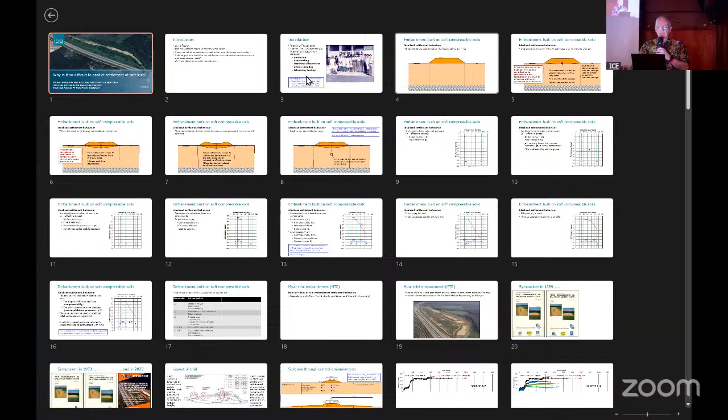Okay, thank you, Valdi, for getting everything ready for me. I would like to just get a laser pointer working. Oh, that's the wrong thing to do. Okay, in that case, I won't try and get - oh no, the laser pointer is here.

Good evening, everybody, both here in our offline venue and for everybody who is online. Thank you very much for joining us for this technical evening this evening.

I chose a title here which might be surprising for people: why is it so difficult to predict settlement of soft soils? As a bit of an introduction, the first question would be, well, is it difficult? I think perhaps, especially for the students who are here, it apparently is quite easy. We get some parameters, we calculate a few stresses and loads, we do a calculation and we get a result. But the problem is, do we often get a chance to check how good our calculations are when it comes to settlement? And I think the answer is not very often.

So today I want to go back to some basics, and the presentation is mainly aimed at the construction of embankments over the Holocene marine clays, which are plentiful around the coastlines of Indonesia, Malaysia, Singapore, Thailand, and so on. These are very common problem soils.

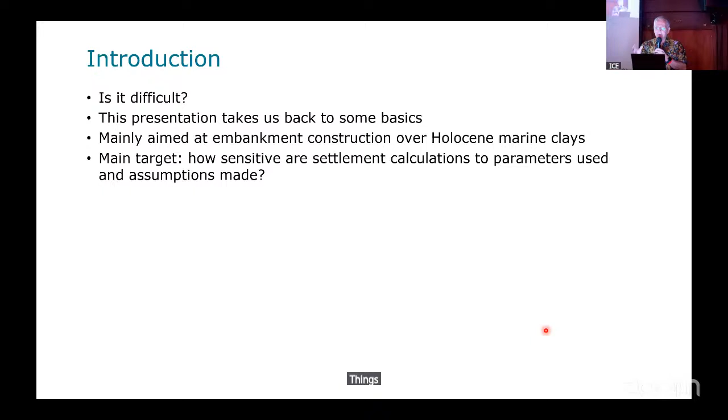The main target of what I want to discuss today is how sensitive are the settlement calculations to the parameters used and the assumptions made, things which seem to be apparently quite simple. To help us, we're going to look at a trial embankment, which provides a lot of very valuable information.

It was mentioned just now that I was lucky enough a few years ago to spend 2 years setting up and running a soil testing laboratory in Malaysia, and you can see our team of people there. I'm not in that picture, I'm taking the picture. If you think I am, actually the tall and distinguished gentleman towards the right-hand side is Professor Peter Wroth, who was one of the world's very finest geotechnical engineers, sadly passed away soon after this photo was taken. Anyhow, that's an aside comment.

I'd just like to mention that in my time with CSL, we carried out a lot of in-situ testing using various techniques. We worked very hard on getting good quality samples and carrying out laboratory testing. I think a lot of my understanding and knowledge today comes from those 2 years when I really had to get involved in a hands-on way.

I also got involved in 2 trial embankments in Malaysia: the Muar trial embankment, which is the one we'll talk about today, and another one a bit later on, which was the Juru trial embankment. Certainly when you get involved in these things, you do learn a lot quite quickly about various aspects of behavior of fills over soft soils.

Now, before I get into that side of it, let's just look at the idealized settlement behavior. Here we have a cross-section through some soil, and the light brown color is our soft soil. If you can just see it there at the top, there is a water table, which I'm assuming is either at or very close to ground level, which it normally is in these deposits.

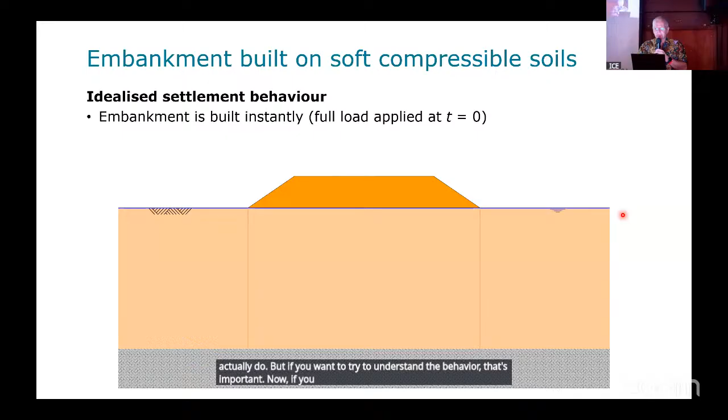That means the soils are all saturated. Now, what we could just imagine is we build our embankment at T equals 0. In other words, instantly, which you can't actually do. But if you want to try to understand the behavior, that's important. Now, if you could do that, you'd get some immediate deformation taking place.

And that deformation is not consolidation. It's due to the distortion of the clay mass by the weight of the embankment. You can see from the lines left and right, it will have pushed the soils outwards a bit, and that's why you get some of this immediate settlement taking place. So the volume change, in fact, is almost nothing. It's a rearrangement of the location of the soil. That's what's going on during this stage.

Now, the difficulty is we can never actually see this because we can't build an embankment at T equals 0. It takes normally weeks or months with putting on layers of fill. So we can never actually see or identify the settlement. We don't really know what it is because you get mixed up with the early part of the consolidation settlement.

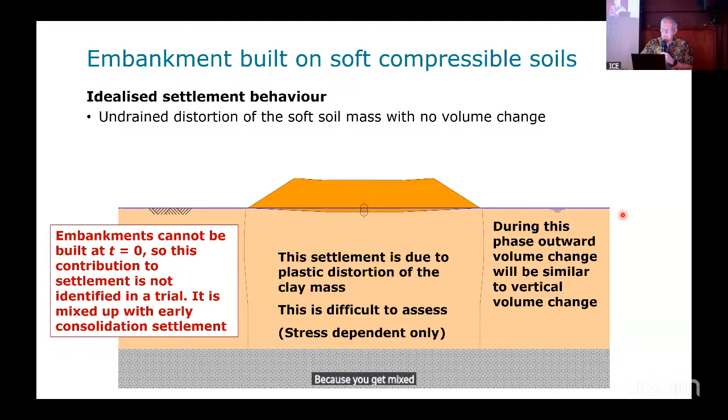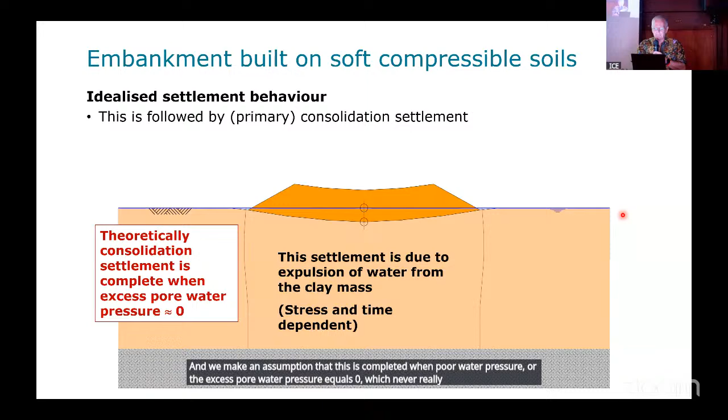Then, as we wait, time goes on, and it could be quite a long time, we get what's called the consolidation settlement taking place, which is due to the expulsion of water from the clay mass. This depends both on the stress and the time. We make an assumption that this is completed when pore water pressure, or the excess pore water pressure, equals 0, which never really seems to happen, but we'll get some ideas about that shortly.

And then into the longer term, we get a continuation of what's called creep or secondary compression or secondary consolidation, depending on which textbooks you read. That's an ongoing settlement, which is depending on the effective stress, and it's time dependent. But it's not depending on the expulsion of water anymore.

What you might notice there is I have drawn the settlement roughly half the thickness of the fill. That's actually about right. That's roughly what we see and you'll see it soon in the performance information. I want to go back to the consolidation stage and just make a point that this presentation, the rest of what I'm going to talk about, is concentrating on the calculation of total consolidation settlement. That's what I'm interested in, because it's the major part of the settlement.

So it is the important bit. I just want to look at a little element of soil, which is in blue underneath the middle of the embankment, and just try to understand how the settlement affects that little piece of soil.

There will be some pressures applied. Also, one thing that's rather important is submergence. You'll notice from the diagram that half of the middle of the embankment is now beneath the water level, so that affects its unit weight or its buoyancy, and that does affect the calculation of settlement. I don't know how often people realize that and take it into account. We'll look at the effects of that a bit later on.

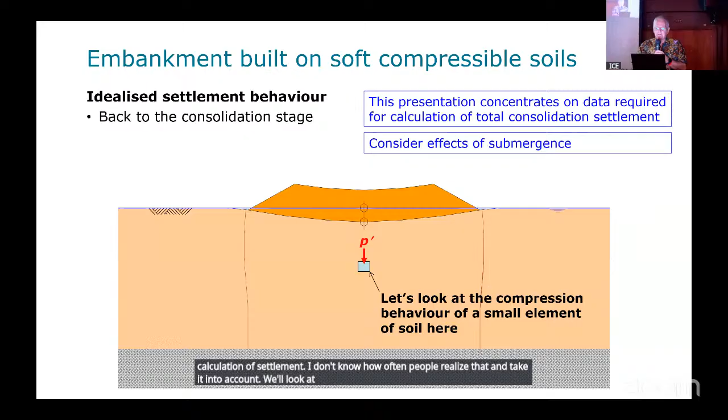How do we get PF, the final stress? Well, we normally calculate that from the increased stress due to the weight of the embankment. Please be aware that these are effective stresses, so that only becomes PF when consolidation is complete.

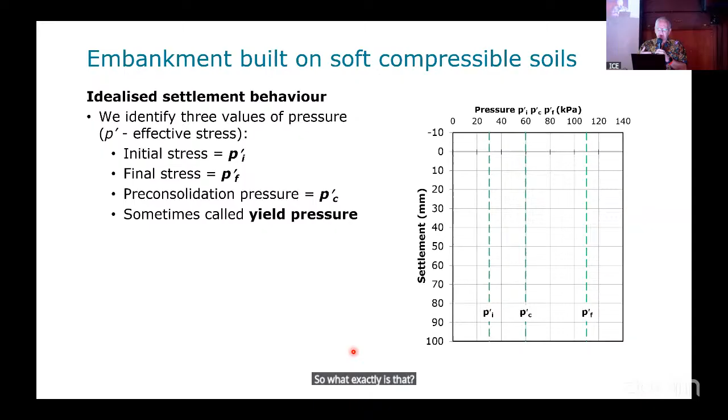We need to be aware of submergence of the fill, as I mentioned just now. There's another pressure, a very important one, called the pre-consolidation pressure. It's appearing in the middle of the graph, this one here. So what exactly is that? Well, it's sometimes called a yield pressure - it's when the behavior of the clay changes significantly as the effective stresses go past PC dash.

So at pressures below PC dash, compressibility is low and the soil is over-consolidated, and it's best to use the MV parameter to calculate the settlement. Of course it's given by the slope of a line. That little red line there is showing you the settlement taking place as the pressure changes from PI to PC.

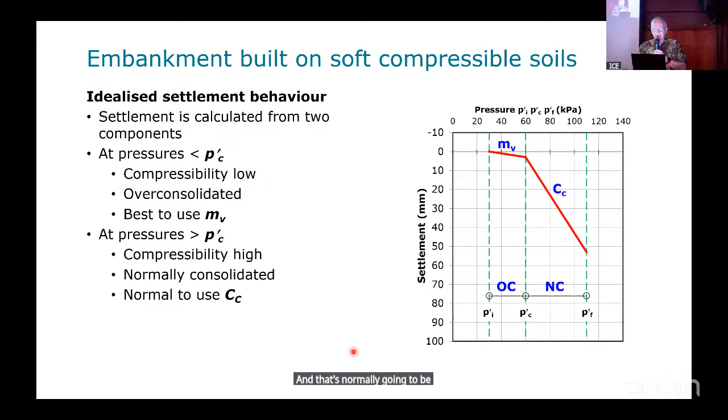Then, as the effective stresses go beyond PC dash, we'll see a very rapid increase in settlement at a much higher rate, and that's normally going to be defined by what we call CC. In this case, the soil has now become normally consolidated, and the huge proportion of the settlement takes place during this normally consolidated behavior phase.

So what you can see there is that the settlement calculations are going to be controlled by 5 main parameters. Let's just have a look at the effects of one, because any errors in any of those parameters can affect your calculation - that's what I want to look at in the rest of this presentation.

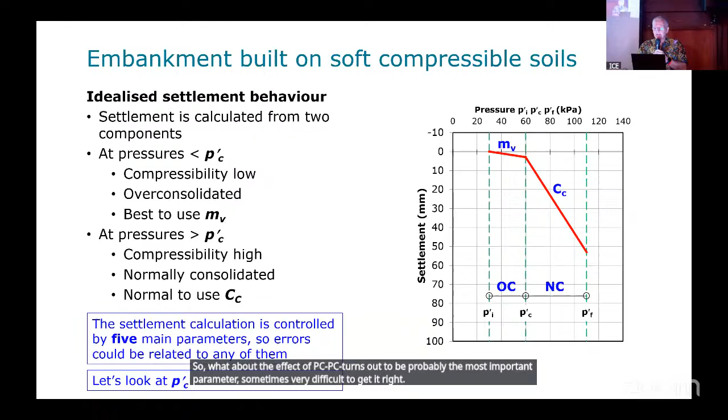So what about the effect of PC dash? PC dash turns out to be probably the most important parameter, sometimes very difficult to get right. If I have PC dash too low, my settlement is much higher than it should be, assuming the other parameters were correct. And if it's too high, then my settlement becomes too small - it's very obvious.

I could make those changes with any of those parameters, and you'd see how the settlement would change. I'm not going to do it for all of them, but just to give you an indication of how sensitive the calculation might be to slight errors or differences in those numbers.

Now, later on, I'm going to talk in a little bit of detail about consolidation testing, because it's a kind of natural thing that goes through your head - right, settlement calculation, I need consolidation testing. Well, of course you do. The consolidation testing is going to give you the slopes of the two red lines - you'll get the slopes from that, in other words, the compressibilities.

It'll also give you the pre-consolidation pressure - that'll all come from consolidation testing. Based on that, you can calculate the total consolidation settlement. There are other parameters which come from testing to help you assess the rate of settlement with time, but today I won't look at that - the main topic is already big enough. So I'm going to concentrate today on the data required for calculation of total consolidation settlement. That's the ones we see there.

I made a table here. As an engineer doing calculations, you've got to assess all of these things. I put down those 5 parameters in this table, with a column showing what each is influenced by. For example, the initial stress will definitely depend on the soil unit weight and the water level. And data smoothing, I'll come to that.

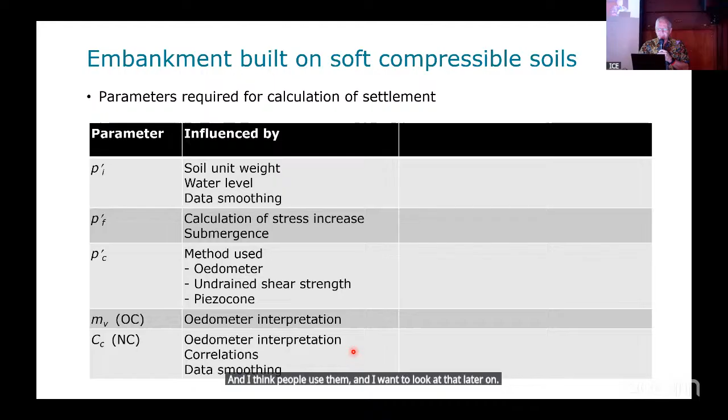So now let's go to Malaysia, towards the southern part of the peninsula, and look at the famous Muar trial embankment. I was lucky enough to spend some time working on this project all those years ago. I want to look at the two controls, called schemes 3/2 and 6/6, where the 3 and the 6 are the target thickness of the embankments in meters.

There is a rather nice aerial view early in construction. I don't know how it was done, because in those days we certainly didn't have drones. I meant to ask someone how they took that picture - it may have been with a balloon, I'm not sure, but I don't think it was from a helicopter or airplane. Anyhow, you can see the layout of the trial embankment there. It was quite big - in fact, the excuse for building it was a lay-by on the highway, and that's what convinced the MHA, the Malaysian Highway Authority, to go ahead with this work.

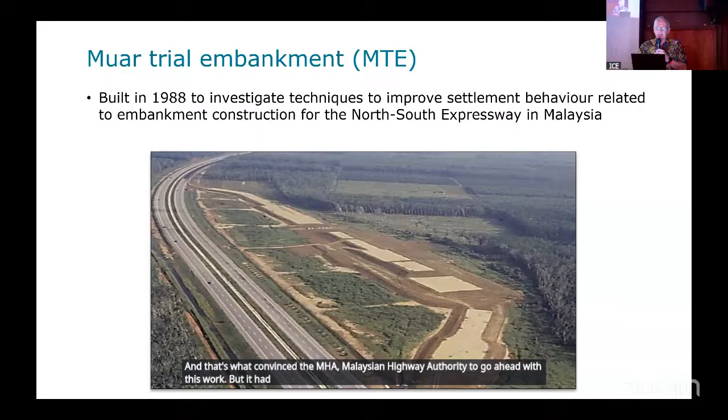But it had a much bigger purpose than that. Based on the vast amount of information that came out of that trial, there was a symposium held in 1989, which I attended - that was the first symposium. Then a few years ago we had another symposium in 2022. I just want to explain why we had the two, and the difference between them.

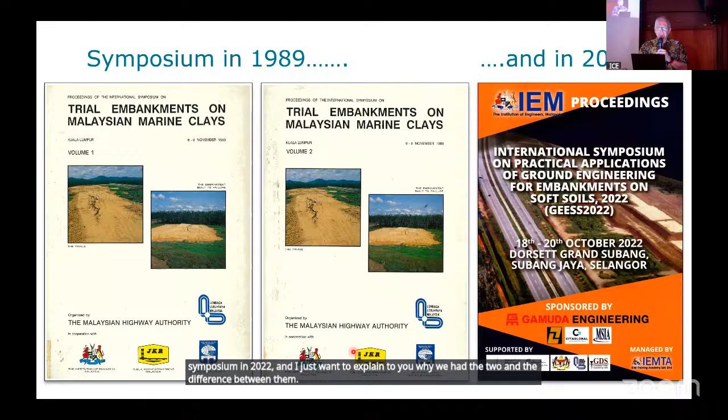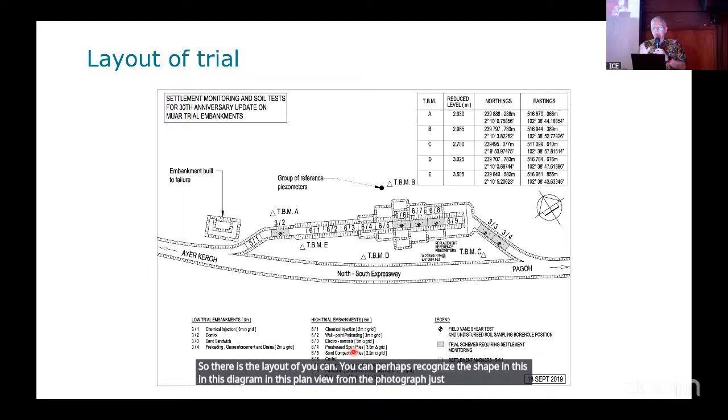So there is the layout - you can perhaps recognize the shape in this plan view diagram from the photograph just now. The 1989 event was looking at the little embankment there, which was built to failure on purpose. A very good competition was arranged for everybody to calculate and submit their predictions for the settlement and the failure height of the embankment. It was an enormous range of values, I can't remember the exact figures from highest to lowest, but it was big.

Fascinating, absolutely fascinating work. Then we come to 2022, and the aim here is to look at the two control embankments, 3/2 and 6/6, and a competition was also set up for people to predict the settlement of those two bits of embankment, now that we actually know it after about 33 years.

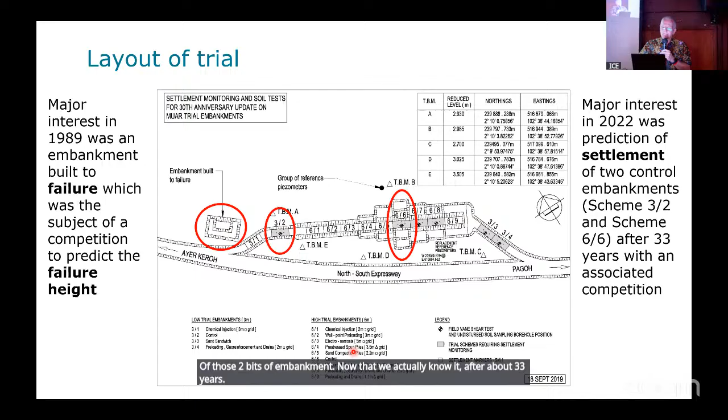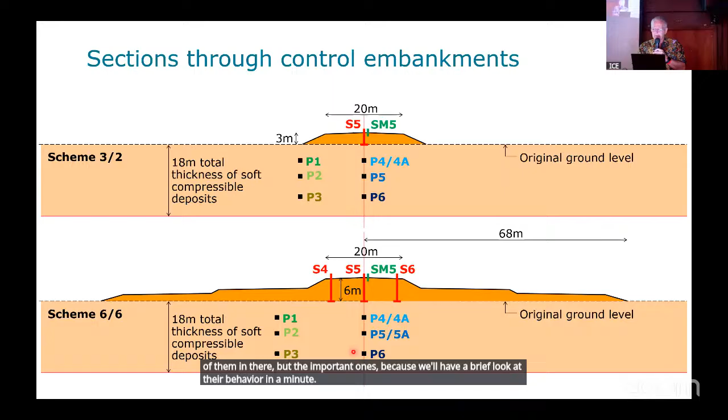Here are the cross sections of the two trials. The top one is the so-called 3-meter control, and the lower one is the 6-meter control, as you might guess. It's drawn roughly to scale, and all of those little black markers with the P values by them are piezometers. I've only put a few of them in there, but the important ones, because we'll have a brief look at their behavior in a minute.

So that's what the cross sections look like. Just be aware that although we call them the 3 meter and 6 meter embankments, they were much thicker than that because of settlement. The 3 meter was a target from original ground level when they reached a certain point in time - so for example, the 3 meter control is about 4 meters thick in the middle.

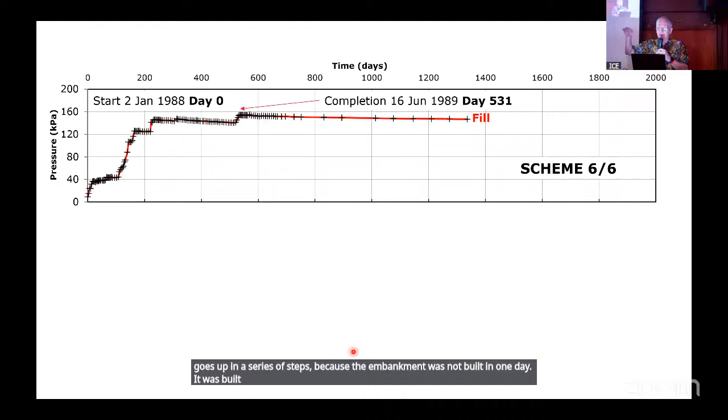Let's have a look at some information from this. So this is scheme 6/6, and I've done this in terms of pressure. I've calculated the effect of the fill as the pressure at the center of the embankment. You can see the pressure goes up to around about 160 kilopascals, and it goes up in a series of steps because the embankment was not built in one day. It was built in a series of stages when the contractor could deliver fill and do it.

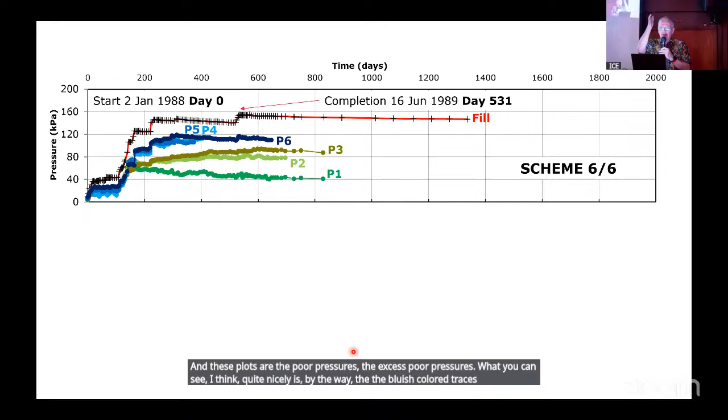And these plots are the pore pressures, the excess pore pressures. What you can see quite nicely is that the bluish colored traces are under the center of the embankment and the greenish colored traces are under the edge. Not surprisingly, under the center is a higher excess pore pressure, and you'll see how the shape of the diagrams roughly follows, or follows quite closely, the loading graph, which is what you'd expect. The pore pressure in those soils which are saturated will react to the load being placed on the top.

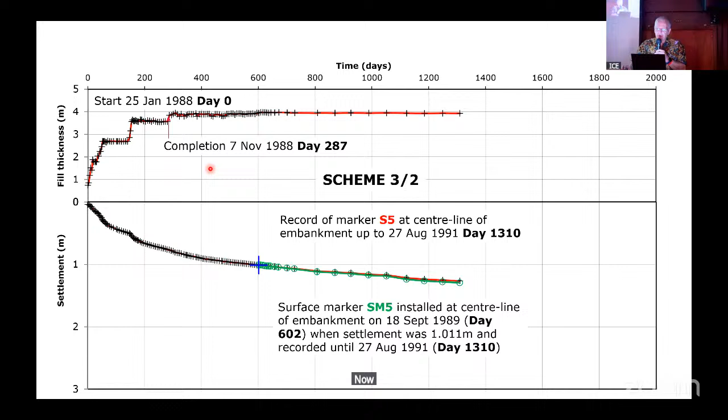Now, at day 602, they installed a new marker called SM5 on the top surface of the embankment and started to measure it. In this case, the two measurements are almost identical, which is very nice. And from this, we get the challenge that was given to the people to predict settlement.

And it's like this. We said, okay, this is now your new starting point. Please predict the settlement on the 30th of June, 2022, which is that many days, quite a lot later, 12,000 and something days later. Incredible target, incredible challenge to take on board. Now, the way it's drawn here, you don't really get the full sort of scale of what this challenge requires.

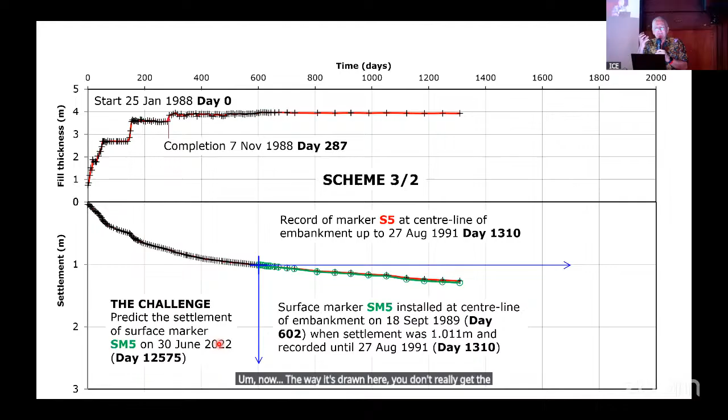And this is the other one. This is scheme 6/6, a very, very similar arrangement. So what happened was that the people were given all of that data, plus all of the site investigation data, a huge amount of data, and they were asked to make these predictions. There were four people who put in their estimates, if you like, their calculations. You can see, and it doesn't really matter about them, let's not worry too much about this, but there are two from Indonesia. And they each had their own way of doing it.

Some of them simply used the existing settlement data. Some of them did calculations based on the soil properties. Some of them did both. Very sophisticated stuff. And these were their settlement predictions of SM5 at that particular point in time. You can see already there is a bit of a variation in the numbers.

So what I'm going to do now, and this is the exciting bit, is to tell you what was actually measured. Are you ready for it? This one was 1.37, and this one was 2.34. And you will notice immediately that they are quite different.

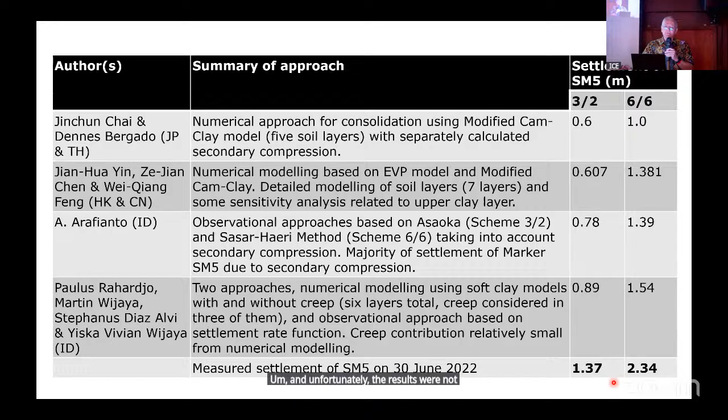And this is the reason for the title of my talk. Why is it so difficult? Because this was done in incredibly sophisticated ways. Some very clever work was done. And unfortunately, the results were not particularly close. So that's what I want to explore now. I better watch the time a bit because we had a slight delay at the beginning.

If I actually put the actual figures on these graphs, that's scheme 3/2. The red bar is what was actually happening at day 12575, and 6/6 is like that. So you can see, don't forget, they had to measure from that point. The total settlement is more because you've got to add on the extra bit. But that's how it was set up.

I'd like to spend a bit of time talking about the geotechnical site investigation for this site. This was a greenfield site, just a plantation area with the occasional kerbau on it and so forth. Actually, this isn't the same place, but it just looks like it - a nice green site in Malaysia.

They carried out a very extensive site investigation and spent a lot of money on it because it was a big thing. Each of the many sections had many tests - lab tests, in situ tests, all sorts of things. So what I've done here is summarize some of the data so you can see it in a simple way.

These are graphs of the various physical and index properties. The first one is basically the Atterberg limits and the water content. This is the PI, which we use for quite a few of the correlations, so I thought I'd show it by itself - it's just the length of each of those lines. The unit weight, which is really important. And this is a piezocone plot, which I want to come back to in a minute.

Let's just look at a few of these things one by one. Now, when I first looked at this data, I was always concerned that the liquid limits, especially in this upper clay, were rather low compared to the water contents, which I've never seen before in the marine clays. So I got concerned - was this an issue with the method of testing for liquid limits?

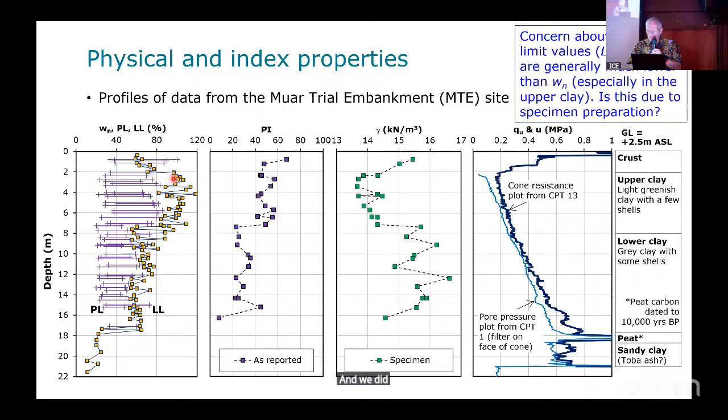We did some research at CSL - two of my colleagues did this - where we looked at the effect of the preparation of the sample for Atterberg limits. When you do an Atterberg limit test, you take out all material greater than 425 microns. You do it by wet sieving, so you end up with a slurry, and you've got to dry it to get back to do your testing. How do you dry it? Well, there are different ways - you can air dry it or oven dry it. Of course, oven drying is much faster, air drying takes ages. But you could also test in the natural state because there wasn't much coarse material in this clay. So we used 3 different approaches.

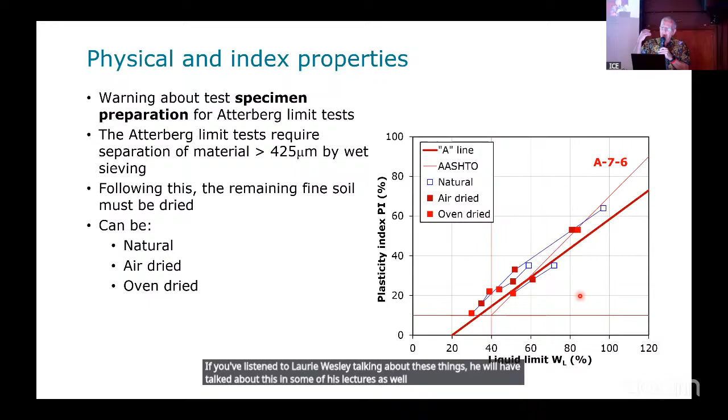When we look on the Atterberg limit chart, the different dots are natural, air-dried, and oven-dried. You'll see that the liquid limit value - if you take any one set of data, let's take this one here, it's easy to see - goes down and down and down as you go from natural to air-dried to oven-dried. We found that was consistent. If you've listened to Laurie Wesley talking about these things, he will have talked about this in some of his lectures as well.

So the method of preparation of Atterberg limit samples is important, especially if you're going to use the liquid limit or the plasticity index in your correlations, which we do. This was carried out by a couple of my colleagues at CSL - some really, really interesting work.

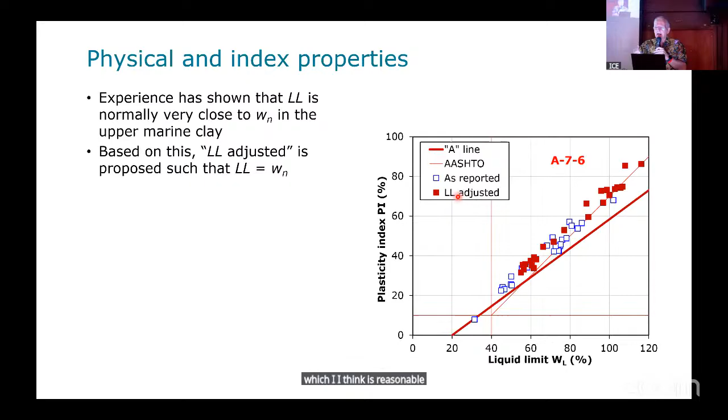If I go back to the reason I mention this, there are a couple of situations where this is important. We'll talk about Bjerrum's correction factor in a minute for vane shear strength - that requires the plasticity index. And we'll also talk about a way of determining CC from the liquid limit. If the liquid limit is wrong, then your CC is wrong as well.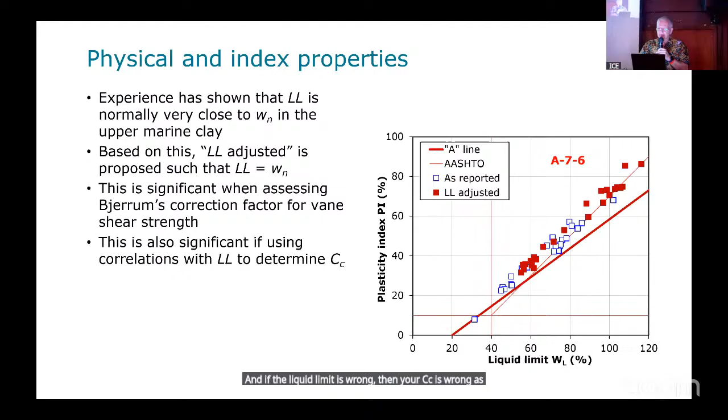So here they are. So what I've done on this PI plot, these little X's or cross symbols, those are assuming that the liquid limit is the same as the water content. And you can see that it's quite a lot higher, especially in this upper clay. This upper clay turns out to be incredibly important to understand its significance.

If you have data points somewhere up here, there's something completely strange about it. Shouldn't be possible. And if you have points way down here, it means the sample's dried out. This little plot is something engineers should do when they get a site investigation report. Do it with Excel or something. It's very quick.

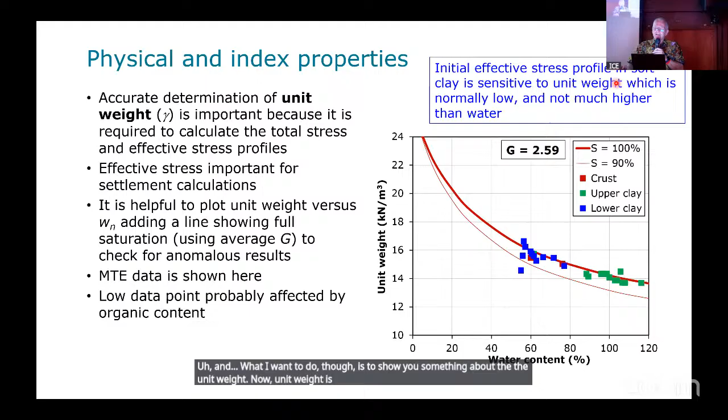So that's what I've been saying. So this is the data from the Muar trial embankment. And what I want to do is show you something about the unit weight. Normally the way we measure unit weight is from cylindrical specimens for triaxial tests and oedometer tests, because you've got a nice geometry, you can calculate dimensions and weight, you get density, easy. But you need good samples. This can go wrong.

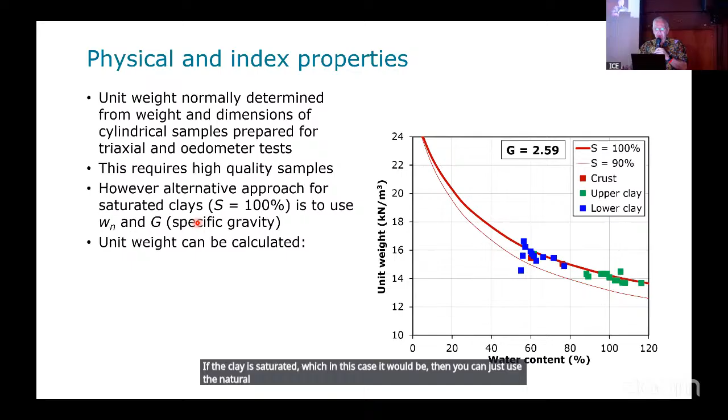So it's rather nice that there's another way of doing it. If the clay is saturated, which in this case it would be, then you can just use the natural water content and the specific gravity using this relationship. Let's not worry about it too much. And from that, we can get unit weight. So it's a completely independent calculation. If I do that, we get rather good agreement.

So if you look at the unit weight plot, you've got the red crosses, those are the calculated ones, whereas the specimens are the green ones. So good, this is good news. This means that our unit weights are pretty good.

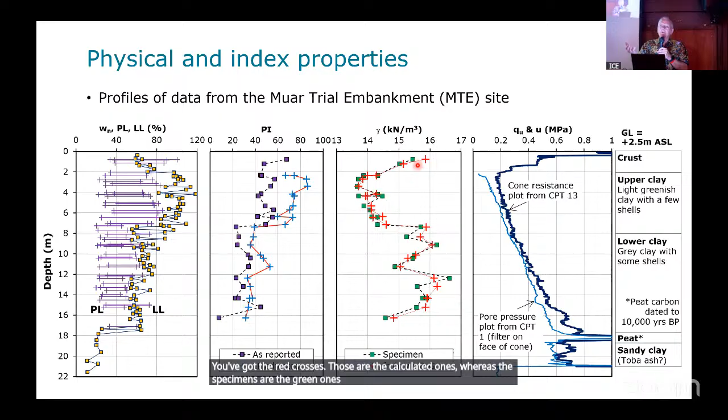Now, why did I show this data from a piezocone or CPTU plot? Well, I'm the world's biggest fan of doing in situ testing like CPTU, especially. It's a wonderful test. In this particular case it's very helpful, but what's interesting is that the upper clay and the lower clay are significantly different, and their contribution to the settlement is significantly different too. Yet this plot doesn't really give you any indication of that.

So the point here is, yes, CPTU, wonderful, do lots of them, but you always need some high quality sampling and testing to get this kind of data as well. You still need to do it. You can minimize it with some good CPTU tests first of all, but it's absolutely vital.

Now, something else, you will notice that there's a big change in properties. And in fact, I believe that change in properties was one of the big reasons for some of those not so good calculations. People did not necessarily appreciate the incredible difference between the upper clay and the lower clay.

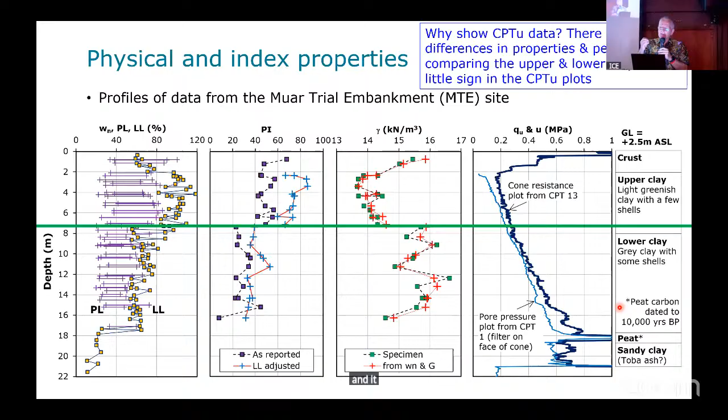These are all what we call the upper marine clay, but it's been subdivided again. And it was interesting that if you read carefully the report from MHA, they made a point that there appeared to be a situation where this clay was being deposited in the early Holocene, say 10,000 years ago, and then it got to a certain level and the sea went down again, exposing roughly this level as a ground surface. It's, of course, then the sun gets there, it gets dried out. So you get a slight desiccation and stiffening of the lower clay, which is exactly what seems to happen.

And this was described in the site investigation report, and I think this was really important. Therefore, once the sea level came up again, then we got the sedimentation of the upper clay, which was therefore a really young clay, much younger than the one down here by a few thousand years. But that's kind of significant with materials like this.

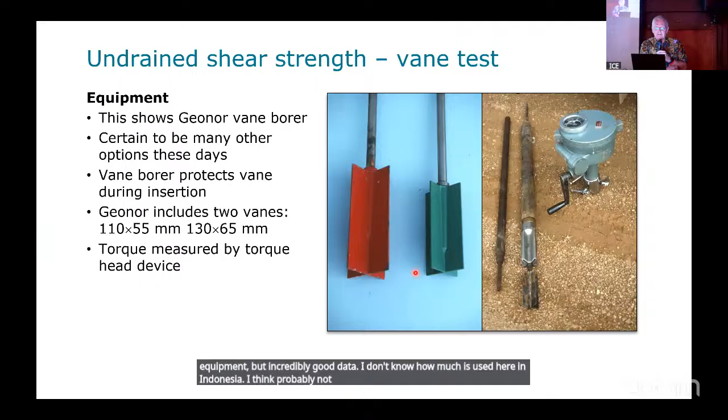A few words about the vane test. The vane test, one of my favorite tests as well. Very simple test, simple mechanical equipment, but incredibly good data. I don't know how much is used here in Indonesia. I think probably not enough in all the soft clays here, but just some pictures of it. I'm not going to spend much time on it today, just to remind you about it though. Very simple equipment. That's a colleague of mine doing the testing there.

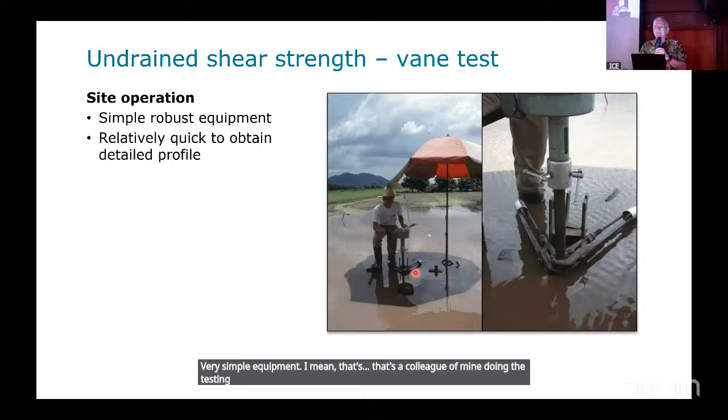No big electronics, nothing like that. It's all mechanical - very nice test. It's done by turning the vane, and from the torque of that, we calculate the undrained shear strength.

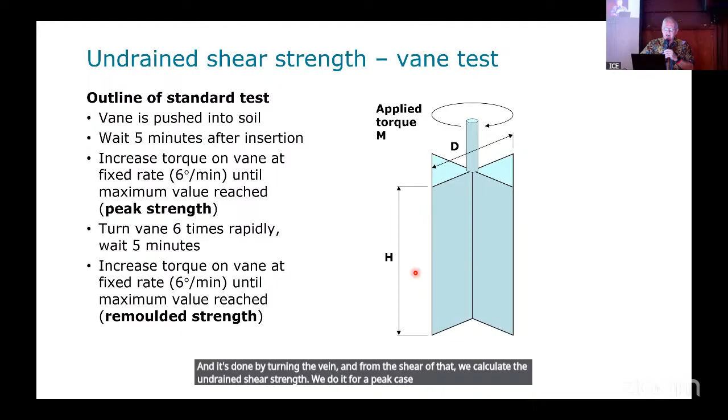We do it for a peak case and also a remolded case, and we plot data like this. These are 9 vane shear plots from Muar trial embankment site, and you can see they're very consistent. So when you see data like that, it gives you confidence. It's very nice.

Now, if you're going to use vane shear strength data - and you should - there's a big question people argue about: should you correct it? Another very famous geotechnical person, Bjerrum, developed a correction technique based on the plasticity index. That's why you need to know the PI to choose the right factor. The idea is you take your strength from this plot and adjust it by this factor, which for a high PI can be 0.7. It's quite big, so that reduces the strength.

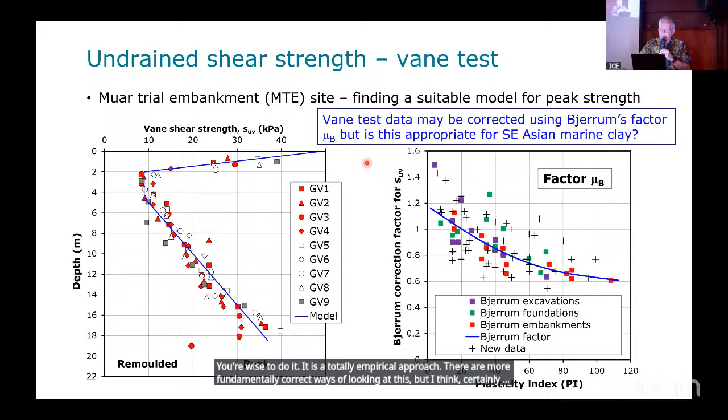Now, Bjerrum's work was based on testing in Norway, and you might say, well, is that appropriate to Southeast Asian marine clays? Well, my experience is it is. From the cases I've looked at of embankments that almost fail, you're wise to do it. It's a totally empirical approach. There are more fundamentally correct ways of looking at this, but I think certainly for initial calculations, I'd be happy to go with Bjerrum's factors, even if they're not excellent.

Now, the reason I'm talking about undrained shear strength, you might say, well, why do that when we're talking about settlement? It's because it gives us a way to find PC dash, this very difficult parameter, the pre-consolidation pressure. Mesri, another well-known geotechnical person, developed this simple relationship that undrained shear strength is 0.22 times the pre-consolidation pressure. This is one of the really useful relationships in soft soil engineering, and it was valid for a wide range of soils. I've checked it for the Malaysian marine clay, and it certainly works okay.

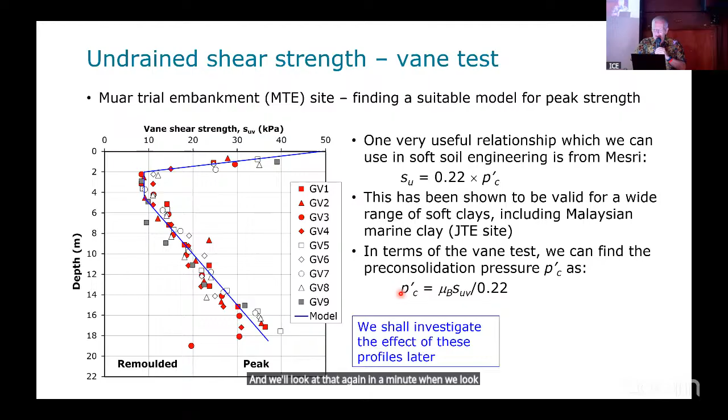So the point about this is we can get PC dash out of this by measuring undrained shear strength. But if we're going to use the vane test, we need to correct it, in my opinion. We'll look at that again in a minute when we look at sensitivity of the calculations.

Okay, oedometer test. Automatically, if you're going to do calculations for settlement, you'd say, oh, I've got to have some oedometer data. And certainly you do need to have it. Here's some lovely equipment out of a catalog from a supplier in the UK called ELE. So nice, clean equipment - it never looks like that in the lab, I can tell you. It gets all dirty and messy, but it looks nice. It's a very simple test, the oedometer test, but it needs to be done well.

So what you do is put a specimen inside a ring, it's circular, with a drainage stone top and bottom, and you apply a load with it full of water. You measure the settlement, and you keep increasing the load. You normally do it in stages, starting, say, for soft clays at 6.25 kilopascals, and you double it each time - double, double, double, double, double. It's called a load increment ratio of 1, and that's the standard way.

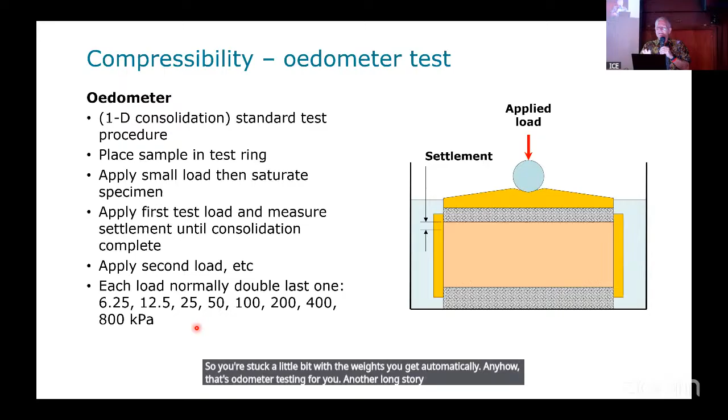And if you buy equipment to do oedometer testing, you get weights to do it, so you're stuck a little bit with the weights you get automatically. Anyhow, that's oedometer testing for you. Another long story, this one - I can't go into it today about how you can do things better, but let's just accept what's going on for the time being.

Here's a very beautiful result. This is a typical marine clay result from the oedometer test, where you have the void ratio plotted against the logarithmic pressure. You can see that's the over-consolidated behavior here, and this is the normally consolidated behavior - that's very clear. Underneath it, I've plotted some derived parameters, things like the CV value, that's to do with the rate of consolidation, MV, I mentioned already, CC already, C alpha to do with the secondary consolidation.

What you will notice is that they change very suddenly, at a point where the slope of the upper line changes. This is identified as the pre-consolidation pressure - in this case, 46 kilopascals. It's really important to see how this works, because the behavior and properties on each side of that line are completely different.

When you look at oedometer testing results, please get hold of the full plot. When you get a site investigation report, you'll have a nice tabulated summary giving you CC, PC dash, maybe CV - and you have to accept it, or do you? You don't have to accept it. You can say, I want to see the full results, I want to understand where you get it from and make my own assessment. I would absolutely recommend you do that when you're depending on these numbers for your calculations. Check them out.

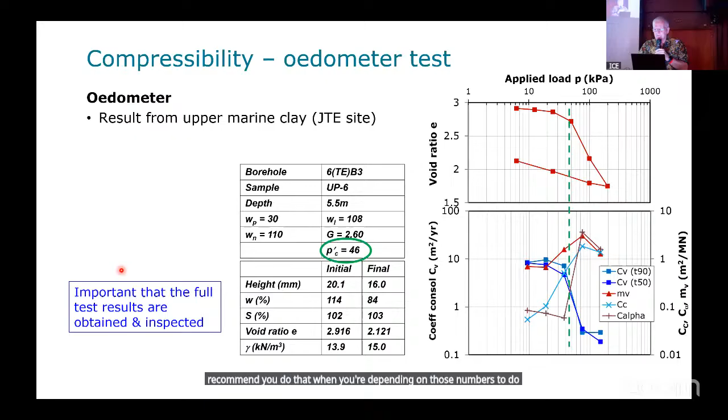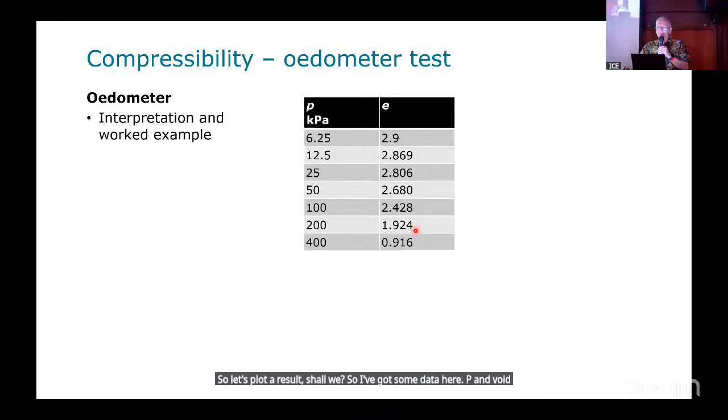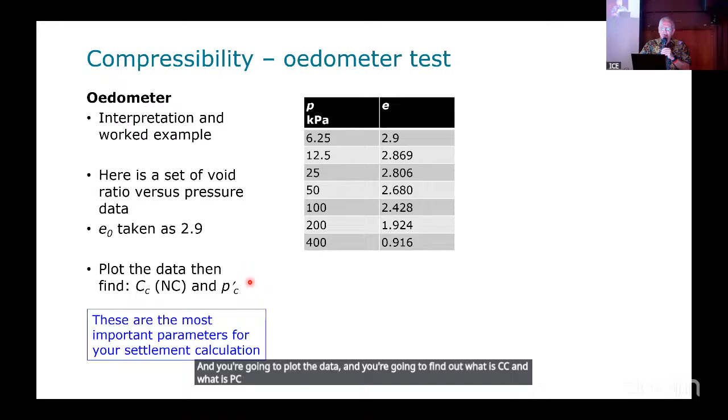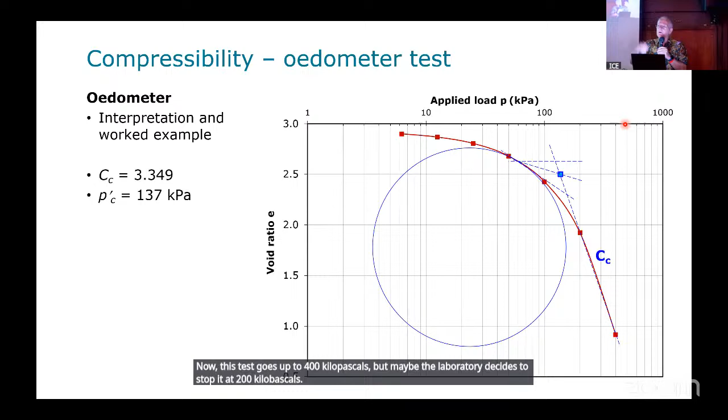Now, this test goes up to 400 kilopascals, but maybe the laboratory decides to stop it at 200 kilopascals because they know your loads aren't very high - low height embankment, why do you need to go up to 400 kilopascals? So they stop at 200 and do the same interpretation. Let's do that - it looks like this because they stop here. They're told to draw a line through the two final points, so CC is now this slope and PC dashed is that blue dot, and they're quite different: 1.674 and 82 kilopascals. And you're relying on these numbers for your calculation.

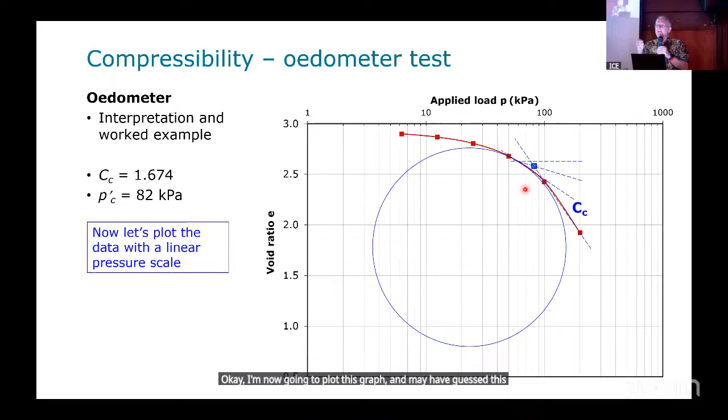Okay, I'm now going to plot this graph - you may have guessed this already - with a linear pressure scale. And when I do that, sorry guys, it's a straight line - I was a bit naughty with that. It's a straight line, so there is no PC dash, and you're very unwise to use CC because it keeps on changing. You won't get a perfectly straight line with any soil, but stiff clays will be quite close to that. The best thing to do then is use a linear parameter called AV, which is just the slope of that line - a unique thing, easy. Then you divide that by 1 plus E naught, and that gives you MV. MV we then use, as I mentioned earlier, in the over-consolidated part of the calculation. So we are.

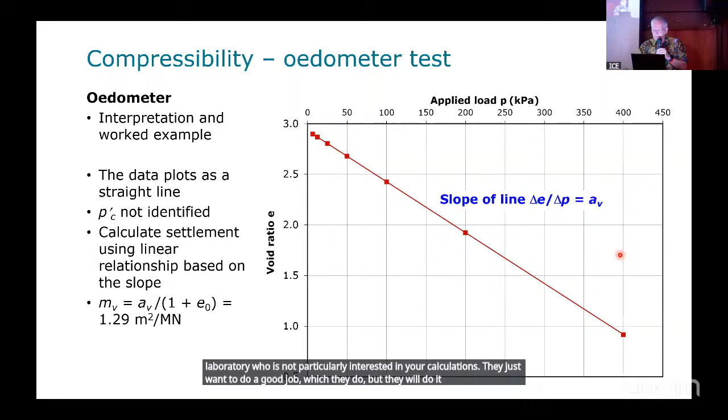I was a bit extreme with that, but I just wanted to show you how sensitive those numbers can be to the way they are interpreted by a technician in a laboratory who's not particularly interested in your calculations. They just want to do a good job, which they do, but they will do it according to the rules. That's why you need to look carefully at oedometer tests.

The reason for that is because I know technicians very well. I would always talk to them about this. If they find it difficult, they always put it at the previous load stage. That's why so often they're at those numbers.

If I then go and change this to a linear scale here, then you'll see some of them are quite good, probably about right. Others are hopeless. So this is a rather important thing to be aware of.

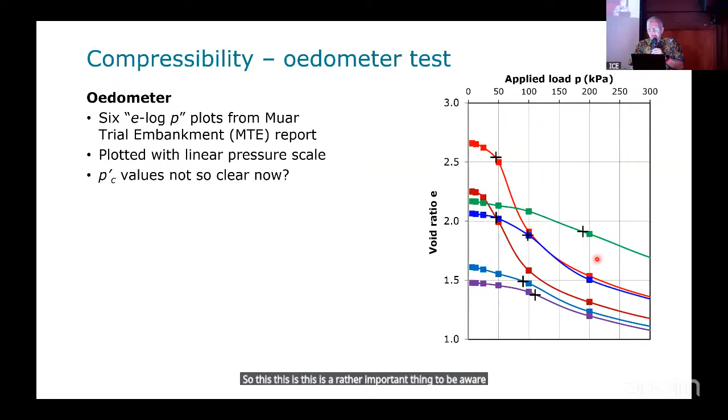It would be my attitude, my opinion, and this is something our good friend Laurie Wesley is very strong about, that you should always plot these in linear pressure scales as well. It's easy these days—the data's all in a spreadsheet or something. Plot it with a linear scale. If you can't see PC on a linear pressure scale, it's not there, which is the case in some of those plots.

Okay, last couple of things to mention about oedometer tests. Here's a series of graphs showing everything we need for our calculation apart from MV. We've got the three pressures, and we've got PI.

This red line is the pre-consolidation pressure assessed from the vane testing using the Mesri approach. We've got CC there, E naught there, and therefore CC over 1 plus E naught. So this little blue trace here is what we might use for our calculations of CC over 1 plus E naught.

Now, I mentioned a very famous correlation, which I can't read because it's gone under this thing here, but you can correlate CC to the liquid limit. I think this was published by Skempton. If I simply do that, I get the red crosses. They are way below what was measured in the oedometer.

But of course, you could use them. People often like to use correlations, it saves them time. And if I do that, then you can see the agreement isn't very good. In fact, your CC over 1 plus E naught plot, which you need, would be this one. We'll look at the effect of that in a second.

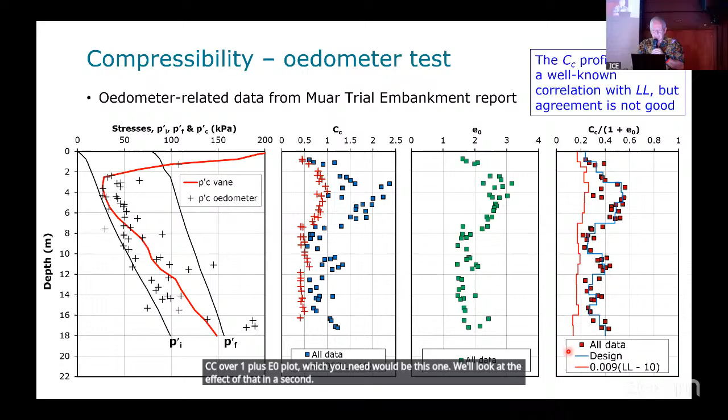Brief word about the piezocone. I mentioned it once already. It is an incredibly good piece of equipment. There will be an event in Bali in September, I think, on in-situ testing. I recommend anybody interested to try to get down there. It's organized by Universitas Parahyangan, Professor Paulus and his colleagues. This will feature a lot.

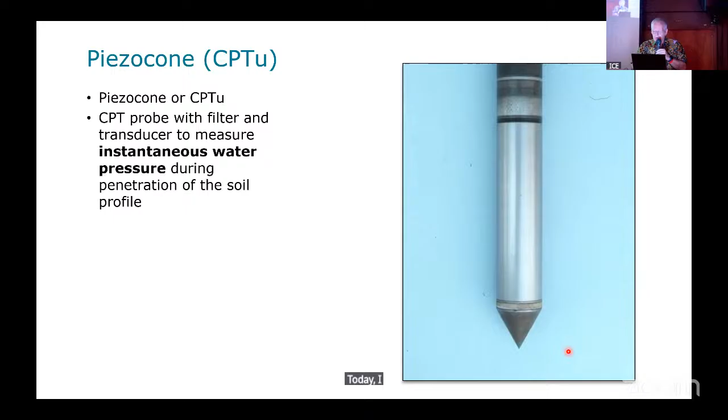But you need to be aware of the limitations. Today I won't go into that. I just want to show you something you can measure. With this piece of equipment, you measure a cone resistance and a local friction—that already tells you something about the soil. With a piezocone, you also have a pressure element which measures the instantaneous pore pressure created by the penetration of the cone into the ground.

It's a whole big topic by itself. Today, let's not worry about the details. I'll just show you this particular plot. Unfortunately I couldn't get the original plots, but these are some plots of interpreted values, where essentially you've got the adjusted water pressure by the in-situ water pressure and a corrected version of the cone resistance. Those are nice because you can use them to calculate two additional parameters called AQ and BQ. What are they?

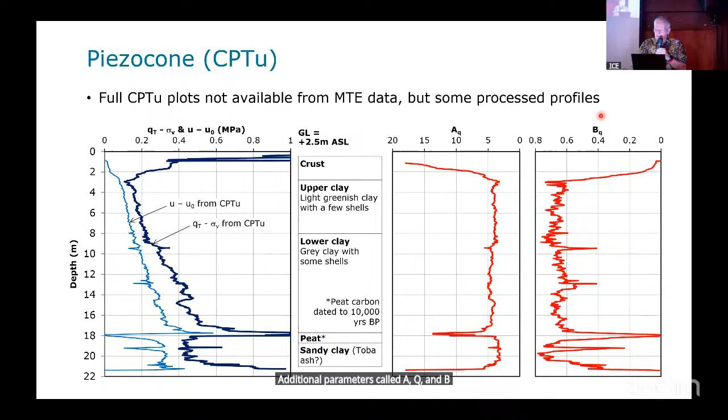Well, AQ is essentially a normalized cone resistance, and this value can be correlated to the overconsolidation ratio, and if you've got that, you've got PC dash. And then BQ, likewise, is a water pressure ratio, and that can also be correlated to the OCR, and it gives you PC dash. So these are different ways of getting PC dash.

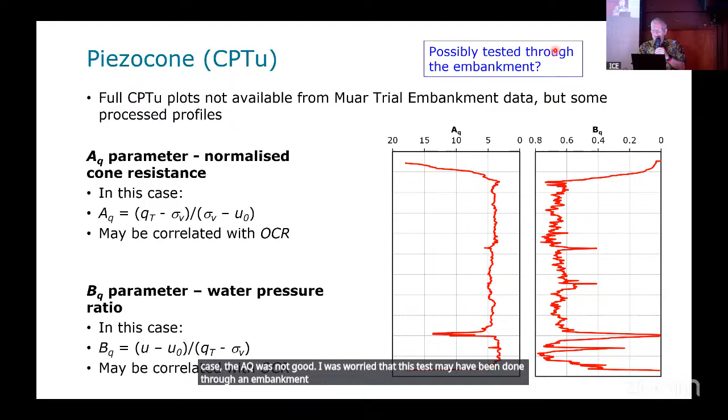Right, the last part of this presentation is quite quick. It's to look at the sensitivity of calculated settlement to the assumptions you use. I'll explain the first bit quite slowly, but then accelerate through the rest, otherwise you might drop off to sleep, which I'd hate. Anyhow, I want to explain how it works, and then look at the sensitivity of the calculation to different adjustments to the parameters or different assumptions you might make.

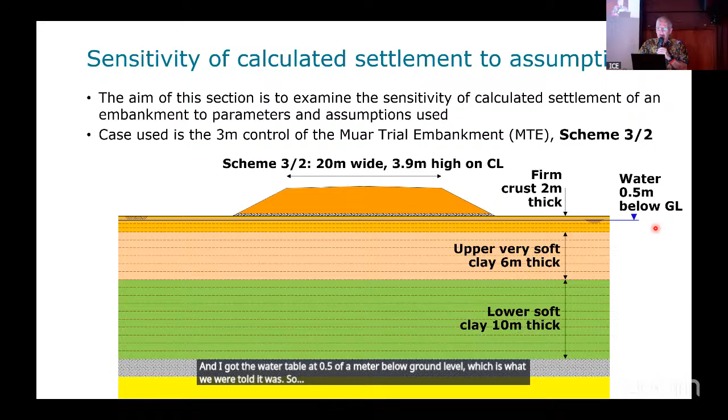I'm going to use the 3-meter control. There's a nice picture of it, roughly the right shape, roughly to scale. To do this calculation I just used a spreadsheet, nothing else. I divided the layer into particular thicknesses, all 1 meter apart from the top, and we've got the upper and lower clays, which are quite different in their properties. I got the water table at 0.5 of a meter below ground level, which is what we were told it was.

So I use that as my typical case, the basic case, as I've called it. The basic case uses that arrangement with the water level like that, and it uses the stress profiles on the next slide, and PC dash is based on the corrected vane strength divided by 0.22, as per Mesri.

Now, please remember, this is only for the primary consolidation. To get the total settlement, you need to include the initial distortion plus the secondary or creep settlement, which I'm not going to look at today. But I thought I would just show you how it works out.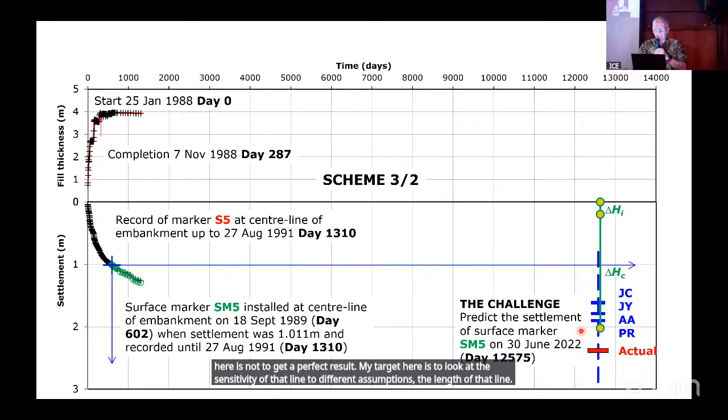So let's look at these things. I'll speed up, otherwise it's going to take too long. I'm going to first look at smoothing the parameters. You might say, what does that mean? Well, I've had to divide everything into 1 meter layers. Now if you're using something like Plaxis, you'll be really annoyed by that, because 1 meter layers all the way down, you wouldn't want to do that.

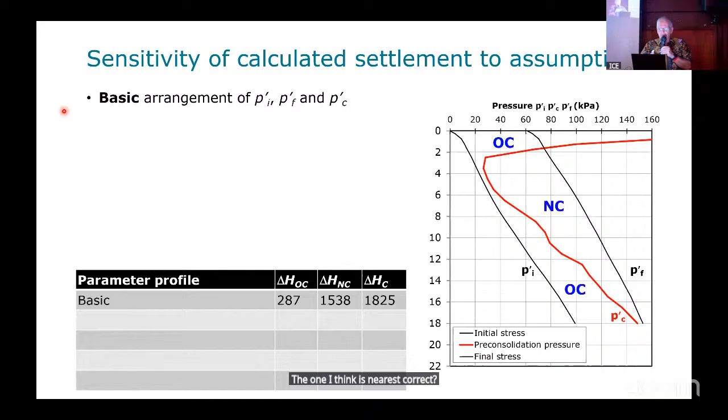So it's going to work like this, and each time I show you one of these things, there are only a few of them, it'll work in the same way. There is my basic arrangement, the one I think is nearest correct, and there are the two values again, going up to a total settlement of 1,825 millimeters.

If I smooth CC over 1 plus e-naught, slightly less, 1805, not significant. If I smooth the unit weight, slightly more, 1836. Again, not serious. If I smooth both of them, almost back to the beginning, 1815. So this is good news for everybody. Smoothing the parameters, as long as you're a bit careful with it, doesn't seem to be too serious a thing to do.

There's one other thing to look at. I want to look at the effect of using that correlated value of CC based on the liquid limit, the corrected liquid limit. I can't see the numbers here, so look at the screen: 1,099, it's a huge difference. So beware of correlations. Okay, that was that group.

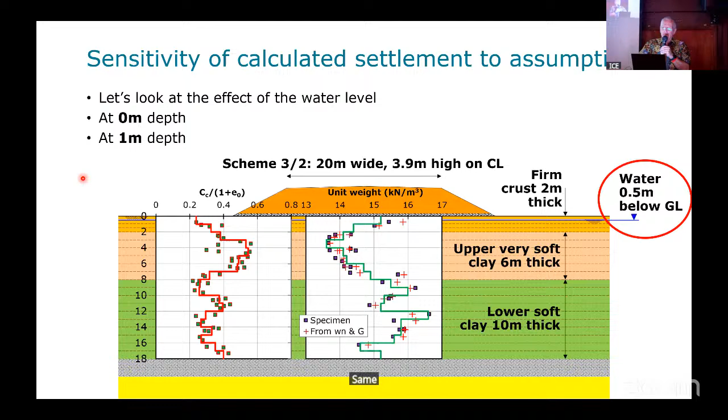Let's have a quick look at this one. What about the depth to the water level? The assumption is 0.5, but maybe it could be slightly different. So let's look at 0 and 1 meter. Same idea, we start off with the basic result like this, and then we look at 0 meters, and you can see the settlement is quite a lot less. Then we look at 1 meter depth, and it's quite a lot more.

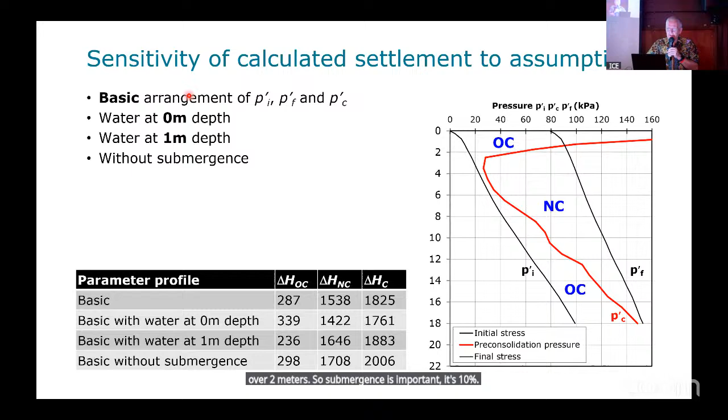And I thought, let's look at the effect of this submergence. So if I take my basic arrangement, but I don't include the effect of submergence, what do I get? Over 2 meters. So submergence is important, it's 10%. Please have a look at that and think about it when you do these sorts of calculations.

Then the next one is to look at the pre-consolidation pressure assessment, of which there were several ways, but I'm just going to look at the shear strength approach, the oedometer test, and the CPTU. Again, I'll be fairly quick with this, I don't want to take too long over this. So here we go, same approach.

Here is our basic result, 1825. We're used to that now. Now let's look at the effect of different ways of assessing the pre-consolidation pressure. This is using Bjerrum's factor based on the reported PI values. Remember when I said I was worried that the liquid limit was too low? If you'd used the reported values, you would have got 1632. It's a significant difference.

One small thing - if I say I don't believe in correcting, but I just want to use vane shear strength as it is, I'm not going to correct it, you get 1402, which is definitely much too low.

And if I use PC dash from the oedometer, which wasn't very wonderful data, I just ended up with a straight line here, 1666. And finally, if I use that BQ plot, which was rather low, with the little green dots on the diagram, not surprisingly, I get a much higher settlement, well over 2 meters.

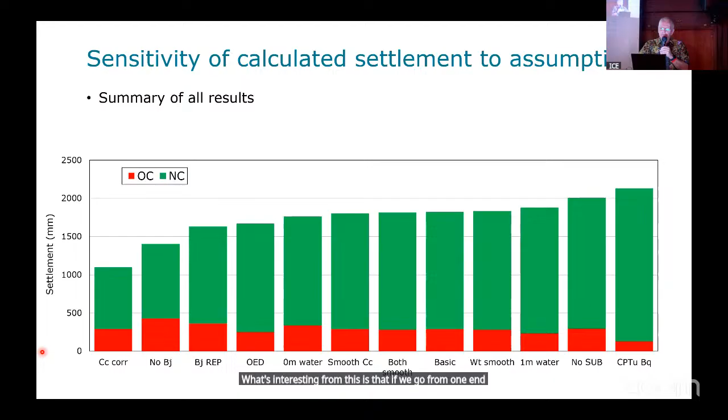So, almost finished now. Just to summarize all those results - what I've done here, I've made a little histogram of the different assumptions I was using, where my basic one is here. Hopefully from my little shorthand, you can work out what each of these ones are. What's interesting from this is that if we go from one end to the other, there is a 1 meter range between the extremes, potential for a 1 meter error.

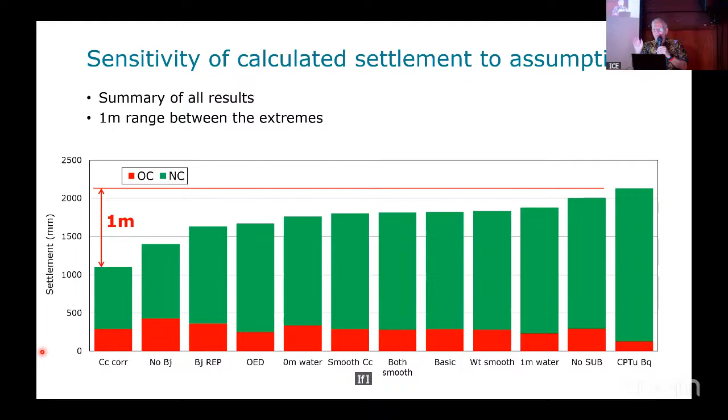And I've only checked one problem parameter in each case. If I combine problems, I think this could have been a far bigger range, or you may have been lucky and get two wrongs make a right, but that's not the best way to do soil mechanics. If I say, okay, well, I think those extreme values are too extreme, I'd never do that - let's just leave them out. You still get a 0.6 meter variation from the top to the bottom. Significant.

So, just about at the end now. I've added some comments on these five parameters. Just look at them quickly.

P-dash initial is generally quite accurate. You're likely to be pretty close because unit weight is not too difficult. You may like to look at sensitivity to the water level, but that wasn't a huge effect.

P-final, you're going to do that either by some kind of elastic analysis, or FEA will do it for you, of course, if you're using that. Submergence is significant. The PC-dash, this is the one that can cause the most trouble.

I think the best thing to do is to try to look at it in a number of different ways. If you've got undrained shear strength testing, you can use that, or vane testing. If you've got oedometer testing, you can use that. Put it all together, plot it on one graph, and make an assessment of what you think is the right thing to do. I believe you need to correct the vane test data.

Oops, sorry, I didn't mean to. MV overconsolidation, that has minor significance. I haven't talked about it at all.

CC is important. Be careful with your oedometer interpretation, and be very careful with correlations. There are many correlations to get CC from index properties. Look at them in a very cautious way, and please check them against real data.

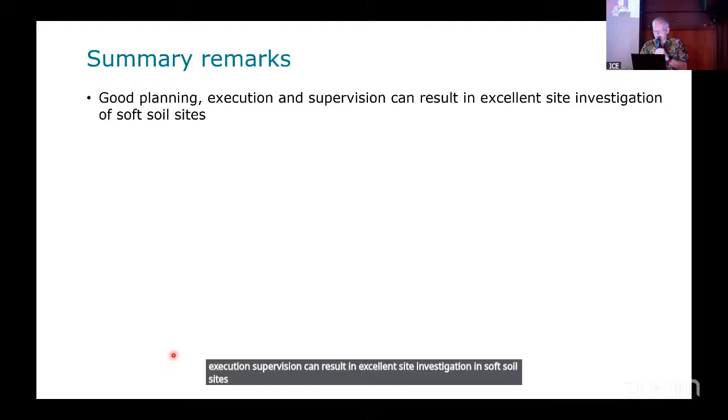So, last few remarks. Good planning and execution supervision can result in excellent site investigation in soft soil sites. Without a doubt, if you're careful about it, you can do a really good job.

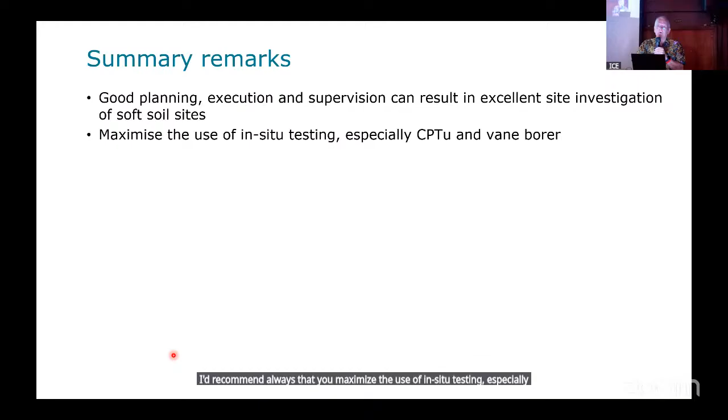I'd recommend always that you maximize the use of in situ testing, especially CPTU and vane borer, which I think are two incredibly good pieces of equipment. But you still do need some high quality sampling and laboratory testing. If you're clever with your CPTU and vane borer, you can minimize the amount of sampling and lab testing, so you can speed up your site investigation.

But I would be recommending that highly.

Please pay attention to details. Supervise. Doing a test correctly costs no more than doing it badly. Make sure that your things are being done in the way they should. Make sure your samples are not drying out. All these little things - if you have dried out samples, you'll get the wrong answer. So all these little things don't cost anything extra. They just require care and attention.

Undrained shear strength is very important because of the way we can get p'c from it. And therefore, the pre-consolidation pressure is very important.

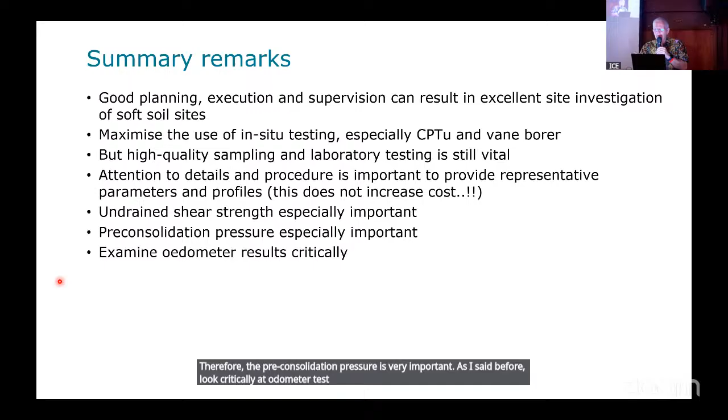As I said before, look critically at oedometer test results. Make sure you're happy with the interpretation. Of course, some laboratories do a wonderful job and their technicians will be spot on and you'll get excellent values, but it is worth checking it because it's such an important test. And try to use more than one approach to determine the main parameters. I think that's a good idea.

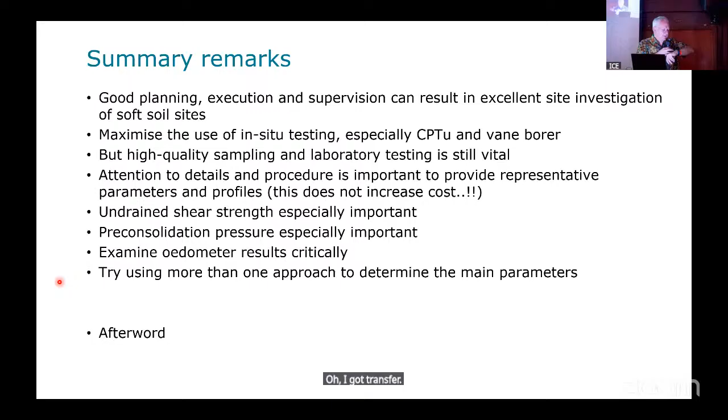Now, I got a chance to, because we had a power cut, I think I have an afterword, which will take me two minutes. Because I'm sure someone's going to ask me, and you should ask me, what about scheme 6/6? You've shown everything from 3/2.

So to save you answering that question, last night I did it. I looked at the effect of this calculation, not all the cases, just the one. So here is my graph, again, just to remind you what we're looking at.

The initial pressure is this black line. The red trace is my best assessment of the pre-consolidation pressure, in this case coming from corrected vane tests. And the final pressure is here. That's scheme 3/2. And my calculation, if you remember, gave me 1825.

For me to now calculate the same thing for 6/6, all I have to do is to increase delta P. It actually was remarkable - I surprised myself last night. It was remarkably quick and simple with the spreadsheet.

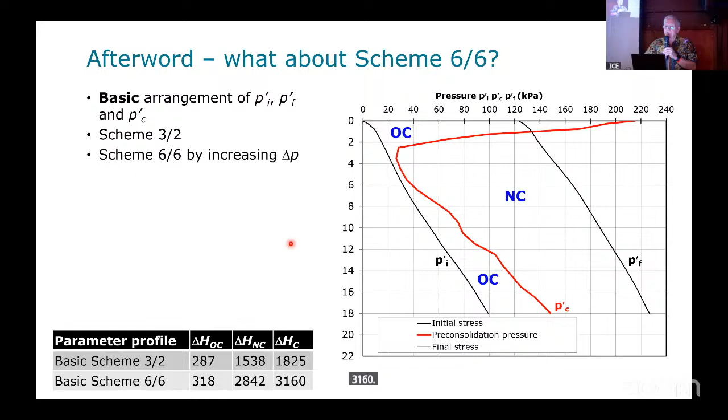It looks like that, and I can't read the number, I have to read it over here. 3160 - is that good? Not bad. The total settlement was 3.76. And remembering that this is only the primary consolidation pressure, you'd expect it to be less than that.

So I have attempted to plot it on this diagram for scheme 6/6. And I think it's quite good, maybe a bit on the high side. The secondary could be quite significant, but I was happy with that. And therefore, I showed you the slide. I think it was quite nice to see how well the approach worked for the different situation.

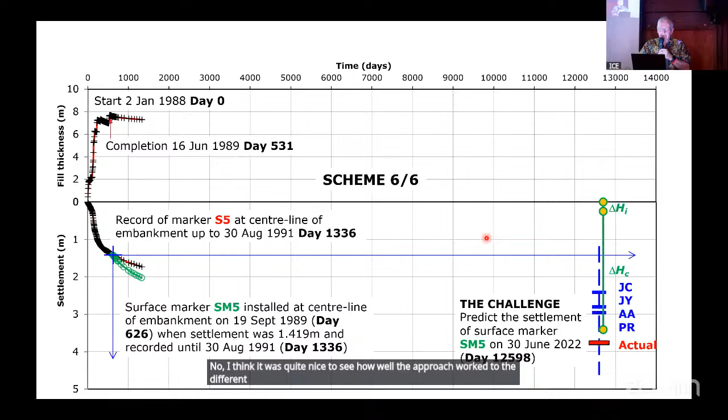Thank you for your attention. I try to get this into one hour.